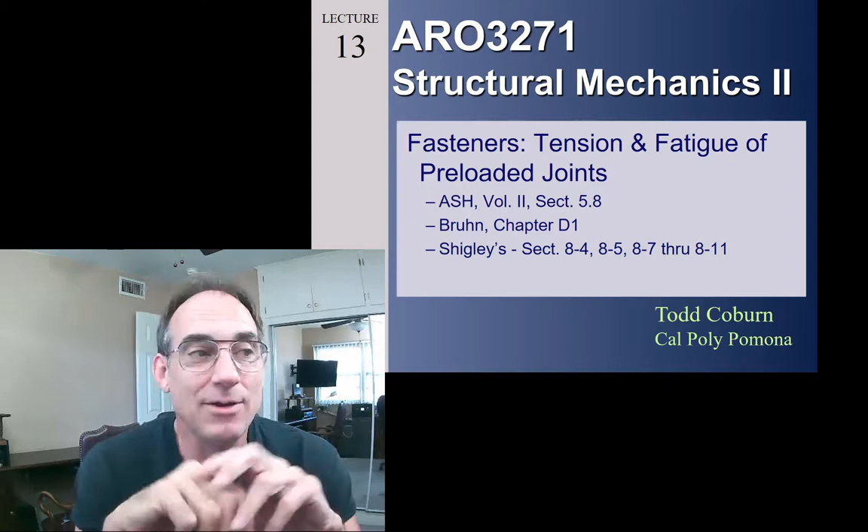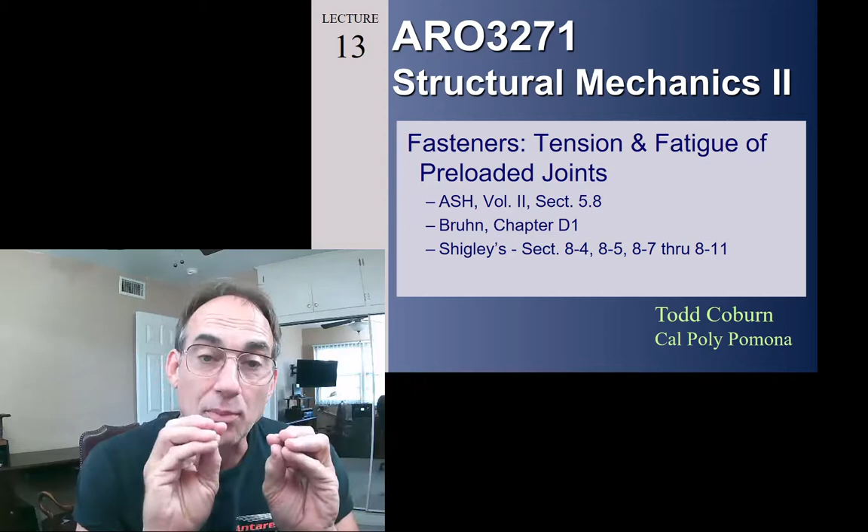3271. Today we're going to be continuing our study into fasteners, and we're going to be looking specifically at tension and fatigue of preloaded joints. We talked about preloaded tension joints last time. We're going to be talking about fatigue this time.

So let's first take a quick look at what we learned last time. We learned about the equivalent bolt stiffness, how to calculate that. Usually we're going to have two terms, one for the shank, one for the threads. We learned how to calculate the member stiffness. We learned that we were going to take a cone at 45 degrees. Now we recognize that other cone angles can be used like 30 degrees, even 60 degrees, but we're going to use a cone of 45 degrees in this class, which keeps our analysis simple and straightforward. We introduced the joint stiffness constant and learned how to determine what the joint forces are in the bolt and the clamp up forces in the members.

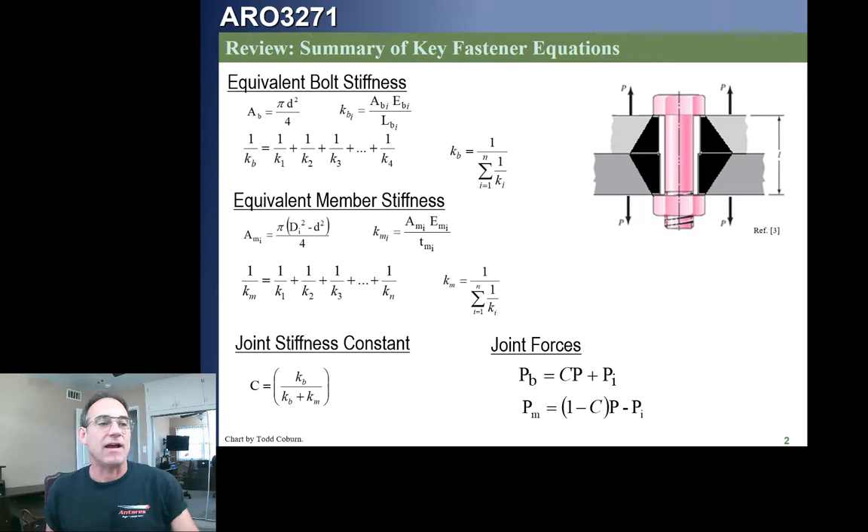Now these two equations once again are valid as long as the members remain in compression, as long as the force in the members is negative. If it's zero or positive, then actually that's incorrect. It's not possible. That means that it's unloaded, that your joint constant is ineffective, and all the load goes into the bolts.

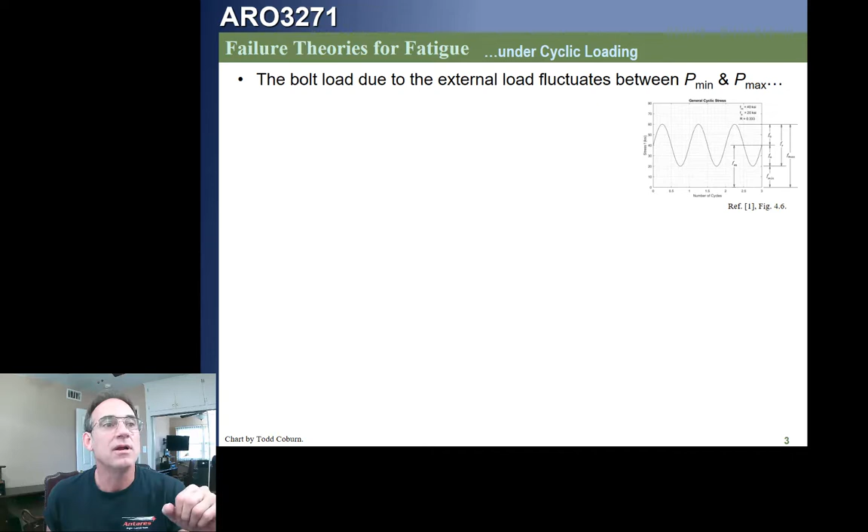Now when we want to do fatigue analysis, having recognized everything we just learned in the last lecture, we saw before that with fatigue we had to characterize our loading. We had to look at the loading parameters, which basically involved identifying the max and the min load so that we could identify the mean and the alternating stress and calculate the fatigue on that basis. We're going to do a very similar thing with some slight deviations for bolts. The bolt load, we'll look again at the max and the min bolt load. We need to get that first.

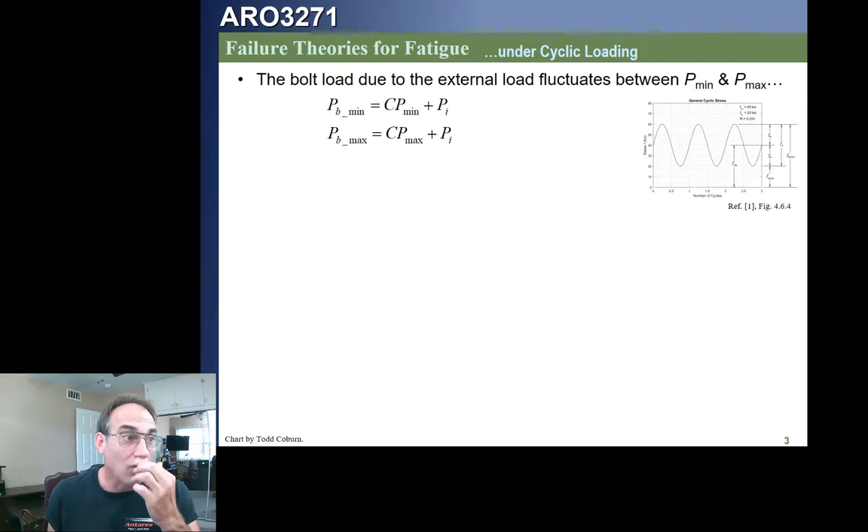First, we're going to take our spring constant. We're going to use this equation as long as, once again, the members remain in compression. If the members remain in compression, then our constant C is whatever value it is. If our members are not in compression, if there is zero or positive, then C is 1 and all the load goes into the bolt. So we identify the max and min bolt loads. We then calculate the mean and alternating bolt loads. Well, that's just, or bolt stresses, excuse me.

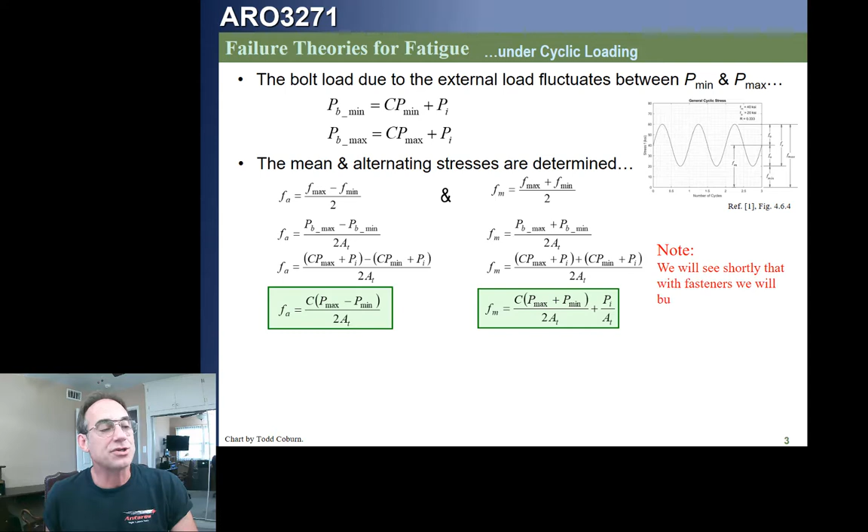That means we just need the max stress and the min stress to calculate using these equations. Since the stress is just P over A, we can write that equation in these formats here and come up with a value for the alternating stress, either calculate the stress max minus min over 2, or use this final equation where the alternating stress is the joint constant C times P max minus P min over 2, area tension. In the same way, we can calculate the mean stress. So these two equations can be used to calculate our stresses in the bolts. Remember, C is just calculated from the formula we got before as long as the joint remains in compression, the members remain in compression.

Then what we're going to do is go and look at, for that bolt, what's the stress concentration factor? We're going to look at that next slide, but we're going to find out that really the only thing for the bolt, we have a stress concentration factor at the head, another one at the thread, but we're going to bury that in the endurance limit for the bolt rather than FM and/or FA. So this is a different approach, slightly different path that we're going to take to fatigue than we learned when we calculated fatigue before for general parts, and that's because our stress concentration factor for bolts themselves are already accounted for in the endurance limit, which means we're not going to apply it to the stresses themselves.

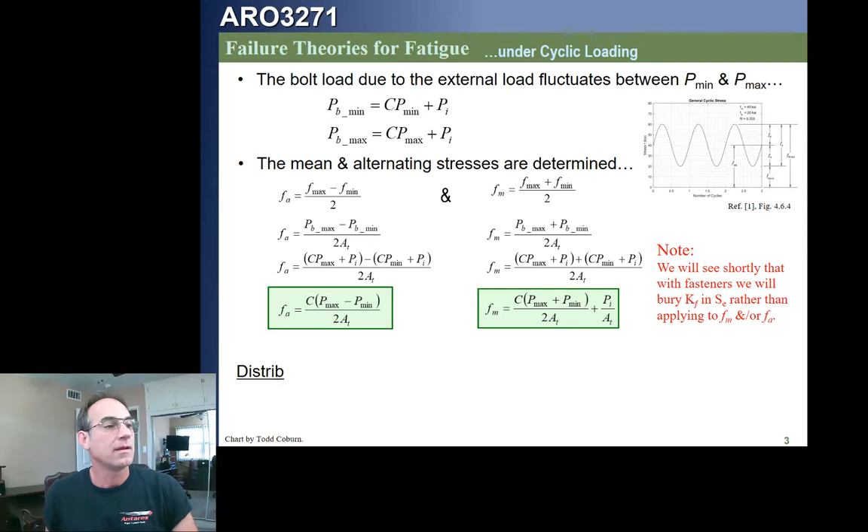Now, if we actually looked at a bolt, we would find that 15% of those failures occur underneath the head of the bolt, 20% at the end of the thread, and 65% at the thread at the nut face. Let's go ahead and take a look at that real quick.

Let's go ahead and draw a bolt here, and let's assume that this bolt is clamping together some parts. So we have a fillet here, there, and then we go into our threads, and then we have the end of the bolt.

And down here we have some kind of nut. We're not even going to draw the washer. Whether or not there's a washer is irrelevant to what we're doing here.

We're going to see that 15% of failures occur underneath the head, right here. Remember, if we are pulling tension on this bolt, which is pulling the joint apart, the head is sitting in a material and it's flexing like this as the shaft of the bolt is being pulled downward, that causes that head to flex. So since that head itself is in bending, we've got tension on this shank, P over A on the shank, P over AT.

And we're going to get, because of this fillet here, a little stress concentration factor. That's why we don't make a really sharp fillet or a really sharp transition from the bolt to the head. We tend to have a nice rounded joint.

Now for all of our bolts made to SAE or ASME standards, there's a requirement for what this radius should be underneath the head. So these made to a standard will all be accounted for in the same way, and that's designed to not have too big of a stress concentration factor. Because we're getting flexing of the head that's pulling up in that radius, that's going to tend to cause failure where we can get something propagating through the bolt. About 15% of failures occur there.

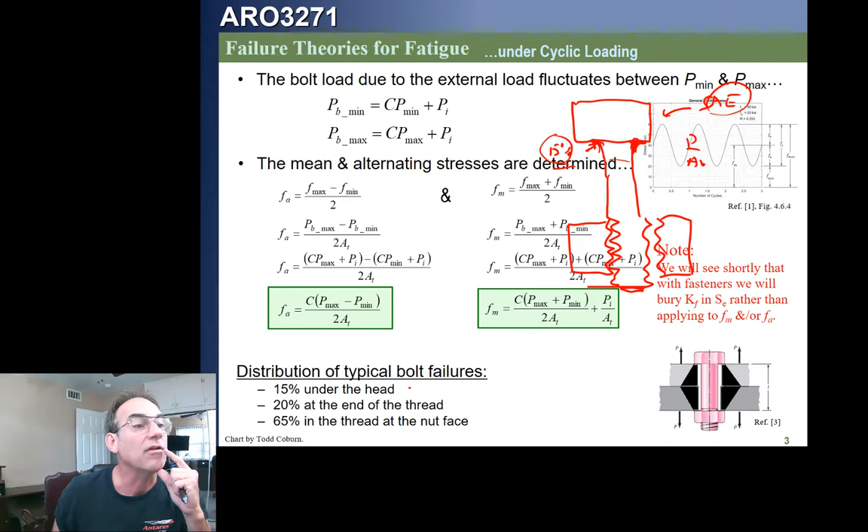Now, about 20% occur at the end of the thread. If we take a look at this, you know what, I'm going to redraw this really quick because I don't like it. Let me erase part of this... there we go, that works. Let's erase my nut and I will redraw that nut for you guys so you can understand this better.

Typically what's going to happen is we're going to have parts that are attached together like this, with some split line, and then we're going to have a nut on this. You'll notice that the start of the threads is right here, and then the start of the nut is down here. So 15% of the failures occur here underneath the head, and 20% of failures occur here at the first thread.

What happens is we have a certain shank diameter, and that's the area of the shank, using this nomenclature, either of those. I'm drawing that cross section. Then on that circular cross section, we've got a thread cutting through it. So what happens is we go from the area of the shank to the tension stress area, A sub T, and there's a little cut out of that area which introduces some stress. That's the first place it happens, so we tend to get about 20% of the failures there.

Now basically once you hit that, you're going to continue. Each thread is going to have a similar stress concentration factor. That first one will probably be the worst, but then we get to the nut. Where the nut is interlocked with the thread, let's say the thread's like this and the nut locks in here. Wherever the nut is, remember that's where this loading is, and that's going to tend to stretch the first thread at the nut face.

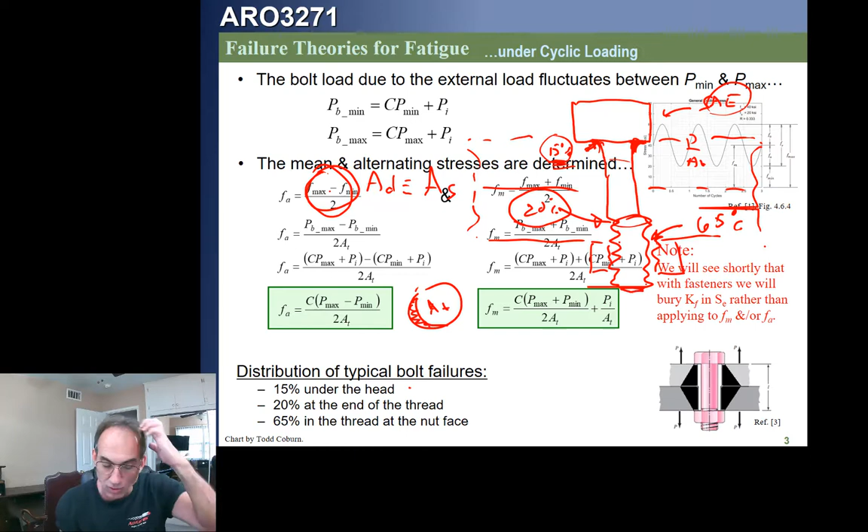The first thread after the nut face is going to tend to open up. That's this one down here. And because that one has nearly the same stress riser as this, but it also has that thread flexing, it's causing flexing of the thread in addition to that tension. That's going to end up making this worse. So about 65% of failures are going to occur right there at the first thread after the nut face starts. So that's where these failures occur.

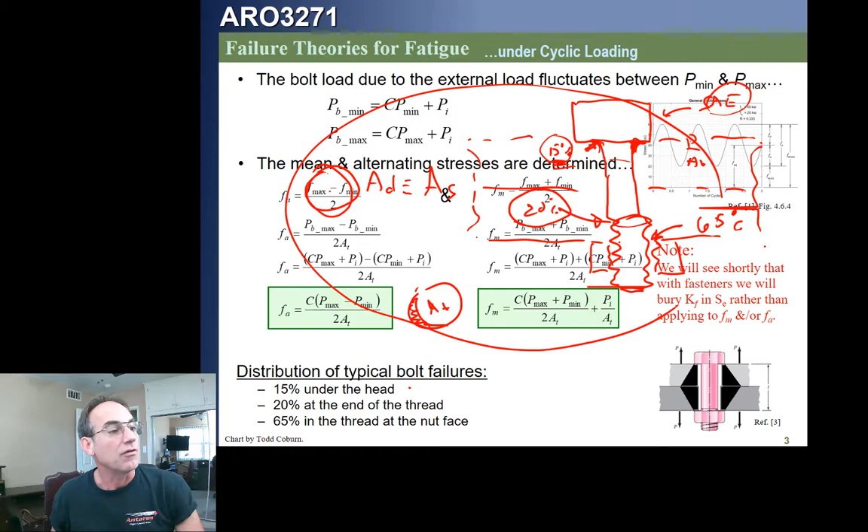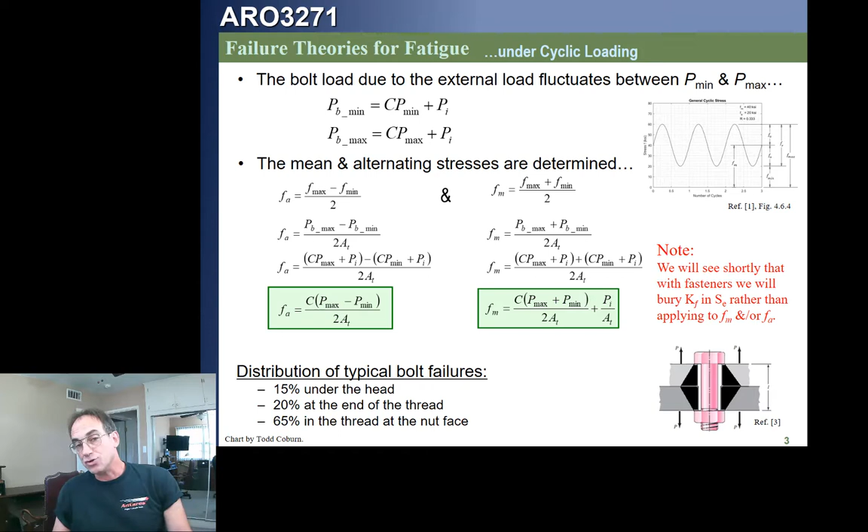Now we're not going to do anything with that other than to recognize that that is where we would expect failures to occur. For this reason, this is why we have a nice healthy radius underneath the head of the bolt, and this is why we tend to like to use rolled threads, which give better fatigue properties rather than cut threads.

Once again with bolts, we're going to have to choose a failure criterion in the same way that we did before. The difference is that, remember, when we looked at fatigue before, once we chose a failure criterion, we would plot the mean stress of our point against the alternating stress. That gave us a point, and then we'd draw a line from the origin through the point and look at the relative proximity to the failure line in order to evaluate the margin of safety.

Now we're going to do the same basic approach, but instead of starting at 0, remember the bolt, if it's preloaded, has a stress to start with. So the mean stress starts at that preload. Whatever the preload is, that's the preload stress. Then we plot our point, mean versus alternating, and draw a line from that preload through that point. Now, we're actually not going to have to do this because we've got a closed form equation.

I've already given you that equation here. This is the equation of the failure line from where it's preloaded to whatever point. So we just plug in our preload stress, our mean stress, and our alternating stress, along with the FTU of the bolt, the S sub E of the bolt, and that gives us, abracadabra, when you plug in your numbers, out pops the margin of safety. New math.

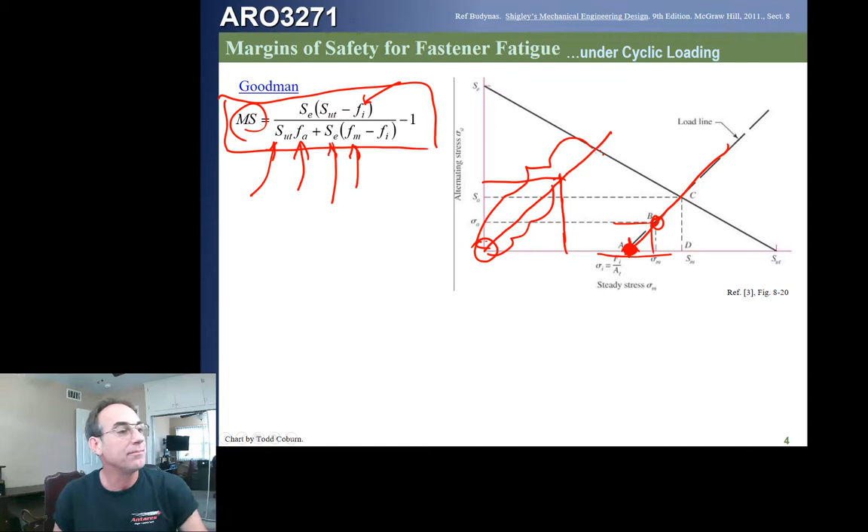Now for yield, remember, we might also want to check yield. If the stress is too high, the bolt might yield, and if the bolt yields, you may see a change in the properties based on what we calculated originally. So this is kind of like what we call the Langer criteria. We're basically taking the max stress and evaluating against yield.

Now for bolts, rather than checking yield, if you have an aerospace bolt and you don't have the proof or proportional limit of the bolt, the proof load or proof stress, then we will use the yield allowable. But many of our non-aerospace bolts have an FTU, an FTY, and a proof load or proof stress, and in that case we will use the proof allowable, which we're calling S sub P. That's the proof allowable. So for a non-aerospace bolt, look at that column we introduced a couple lectures ago, that will give you the proof load.

If you don't have a proof load because it's one of the materials in the back of your handbook rather than one of the bolt materials we gave you, then we'll just use S sub Y, the FTY. You've got your thread area and your max loading, so you can find out if there's yielding. Now, if there's yielding, that doesn't mean you have a fatigue failure. It means you might have one. It means that the margin of safety fatigue might not be valid.

Now, the other thing we need to do is check for separation. We need to make sure the joint doesn't separate, or more precisely, that the members being squeezed by the preload of the bolt don't unsqueeze under loading. If it unsqueezes, that means our C becomes 1 and all the load goes into the bolt. So instead of the full member load equation I gave you before, we take part of it: the member relaxation due to external load. You take the preload, P sub i, divided by the max external load times 1 minus C, and that gives you the margin of safety. Of course, this is only valid if your joint remains in compression, and this margin of safety tells you whether you separate.

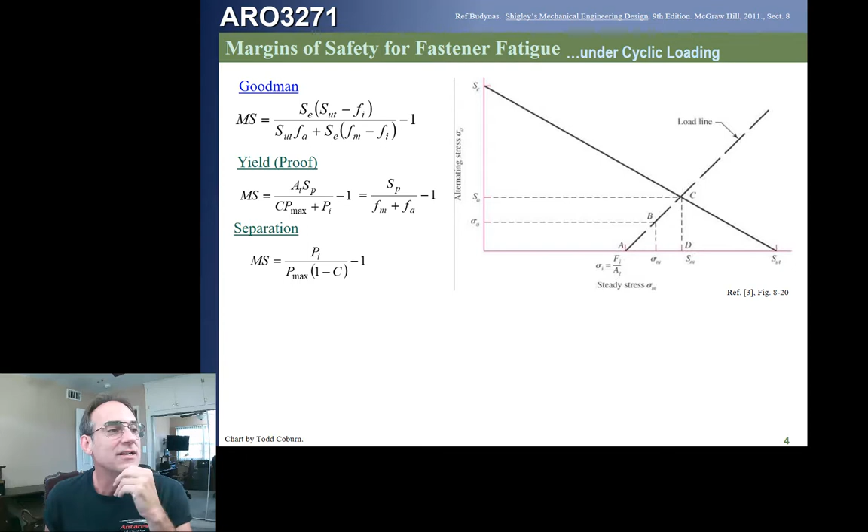If we chose a different criterion, like the Gerber criterion, you've got this equation, which has the alternating stress, the endurance limit of the bolt, and the FTU of the bolt. Notice that in the Goodman criteria I am using SUT, that's just FTU, and in the Gerber criteria I'm using FTU, which is actually the same thing as SUT. So it's the FTU of the material, or the max ultimate strength.

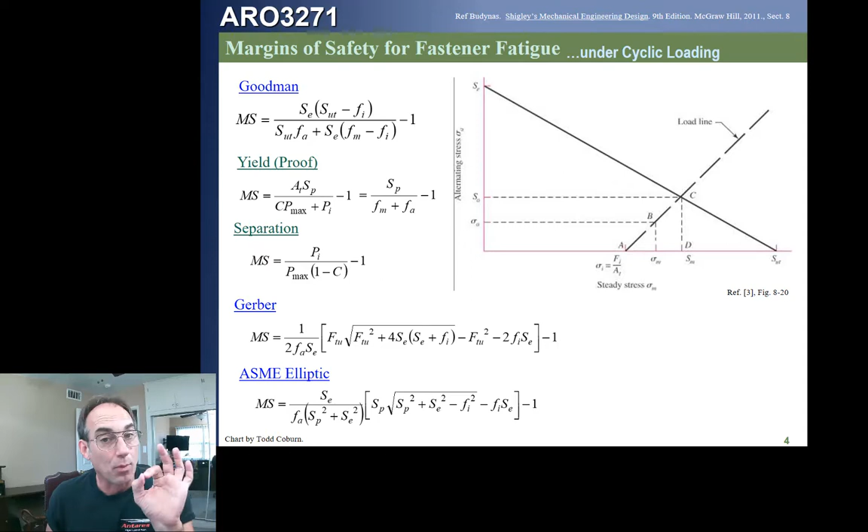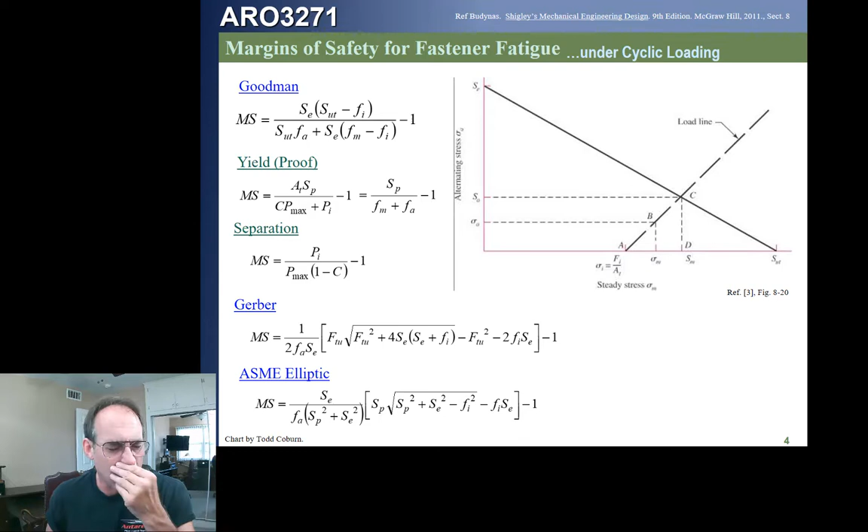We've got the endurance limit, we've got the preload, and that's it. If we use the ASME elliptic criteria, then we've got this equation. We're going to plug in the endurance limit, the alternating stress, and the proportional limit of the bolt. Notice this is the proportional limit of the bolt. If we have a bolt where we don't have a proportional limit from that table, then we'll use FTY.

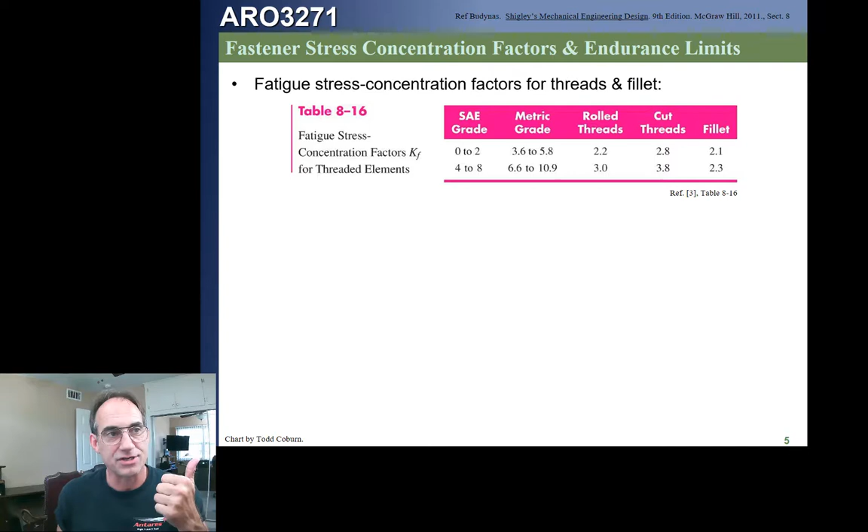But if we have a proportional limit listed for non-aerospace bolts, then that's what we'll use. That's how that works. Now, I told you we weren't going to apply a stress concentration factor. This is the fatigue stress concentration factor for different grades of bolts. The first column is for rolled threads, the second column is for cut threads. You can see cut threads have a higher stress concentration factor. We also have a value for the fillet underneath the head of the bolt.

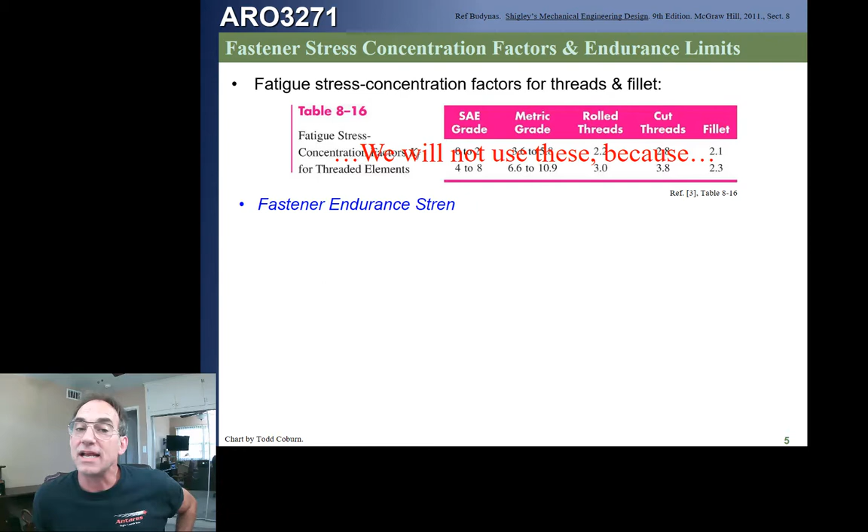However, we aren't going to use this, because what we're going to do is dump that right into the endurance limit. If we use these endurance limits for grade 7, 8, and so on, those endurance limits are based on testing, which means that bolts made to those standards already had whatever stress concentration factor was valid. Therefore, these endurance limits include that, so we're not going to apply it again. We're not going to apply that fatigue stress concentration factor a second time. Does that make sense?

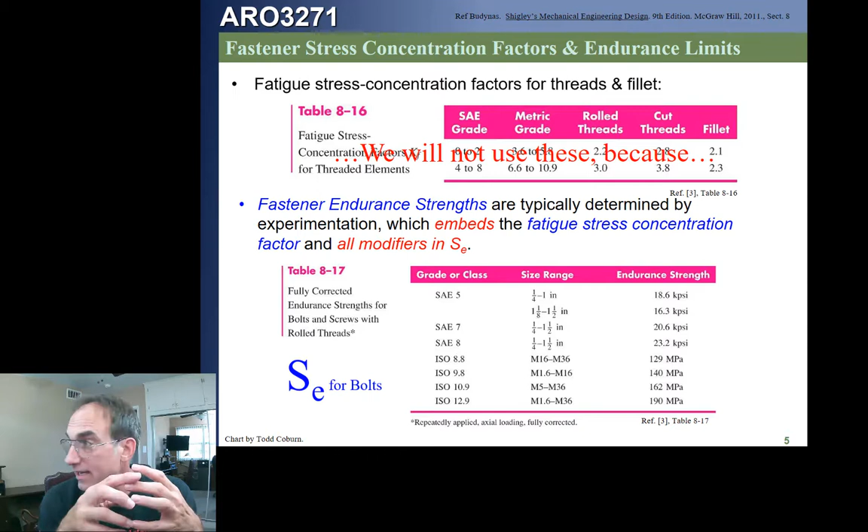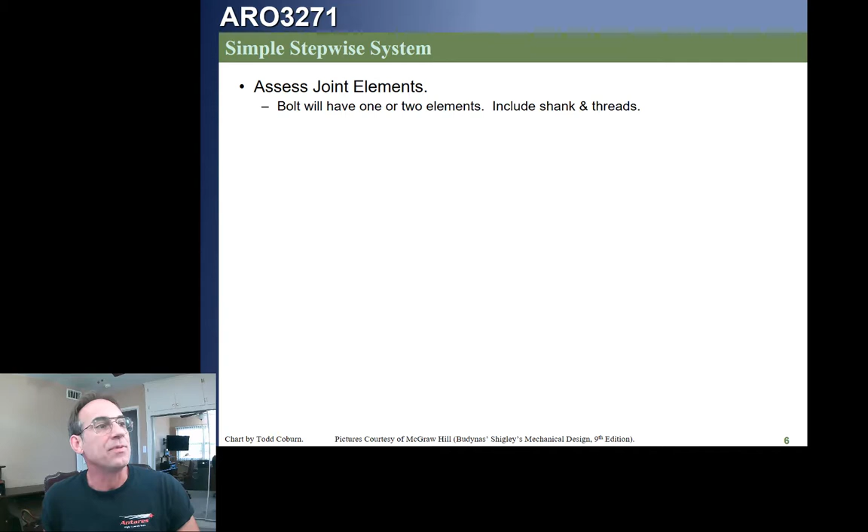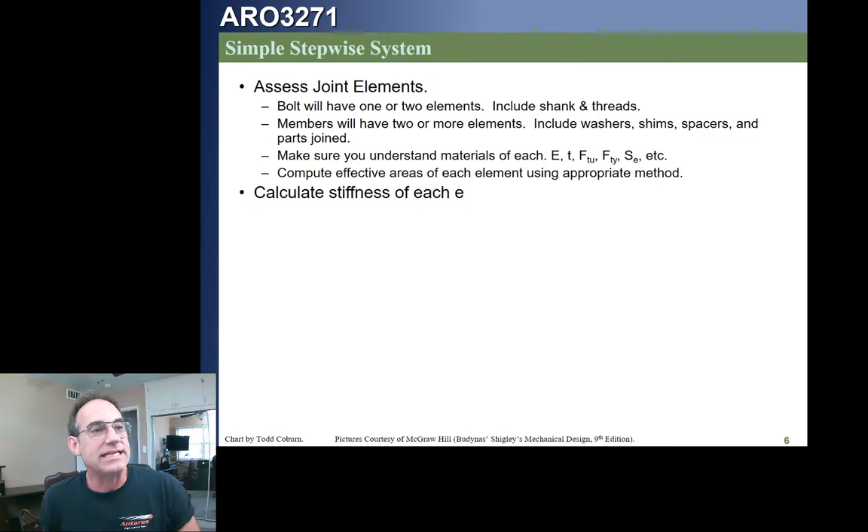Okay, so here's a basic, simple, stepwise system. We're going to evaluate our bolt stiffness, K. We're then going to evaluate our member stiffness using that 45-degree cone angle. We're going to make sure we have all the detailed information we need. We're going to compute our effective areas, calculate the stiffness of each of those, and determine our effective stiffness for the bolt and for the members.

We're going to calculate any preload values and any external load values. We're going to calculate whether the joint, the members, remain in compression or not. We're then going to calculate our max and min bolt load, and the average and alternating stress in the bolt. Then, once we choose a failure criterion, we will calculate the margin of safety in the bolt.

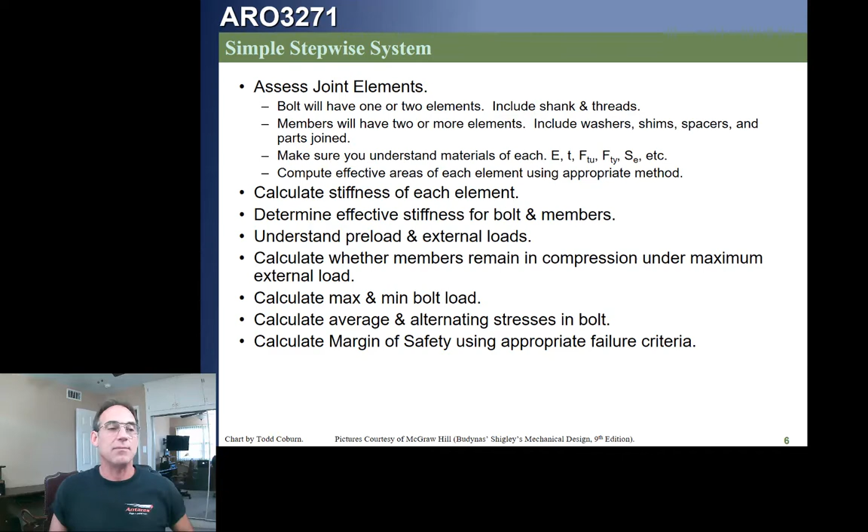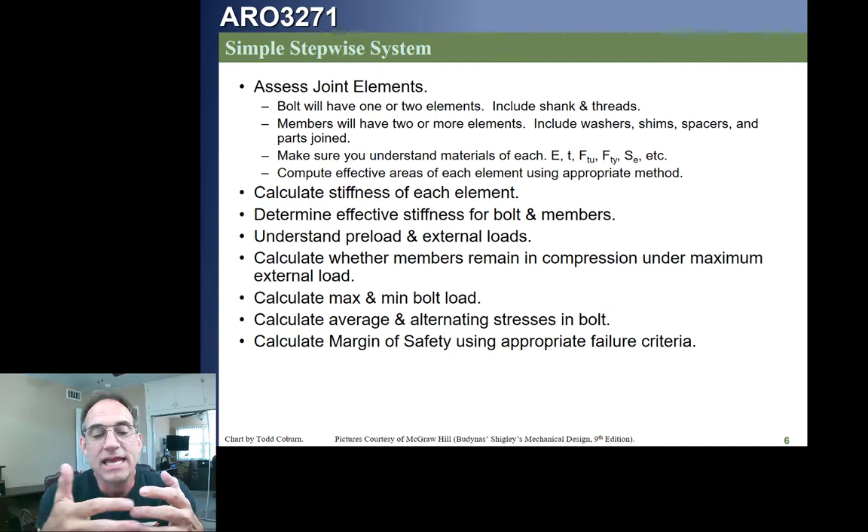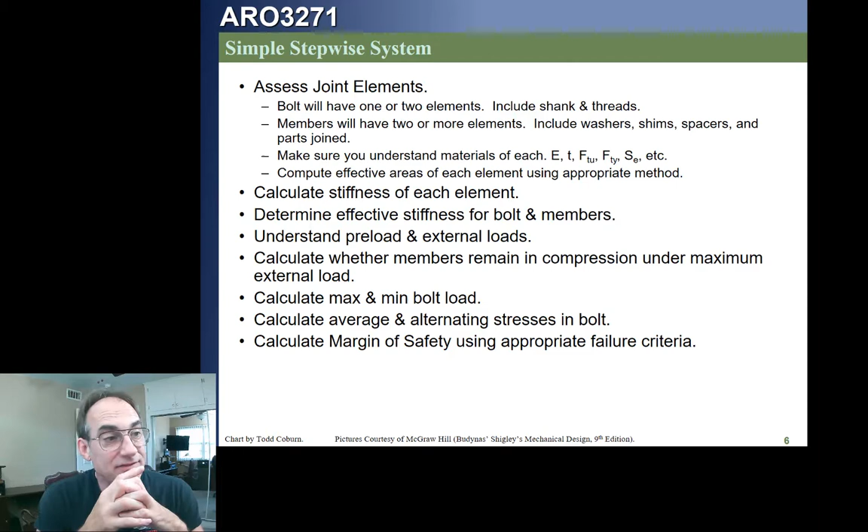Now remember, when we evaluated fatigue, we were evaluating the margin of safety for infinite life. If it succeeded, if it was a positive margin of safety, we expected infinite life. If it was negative, we did an additional analysis to figure out how many cycles it's good for. We could do that for bolts, but we aren't going to, basically because bolts tend to have lots and lots of loading cycles. We're going to design bolts for infinite life, which means if it doesn't show infinite life, we're going to redesign that joint in this class. Got it?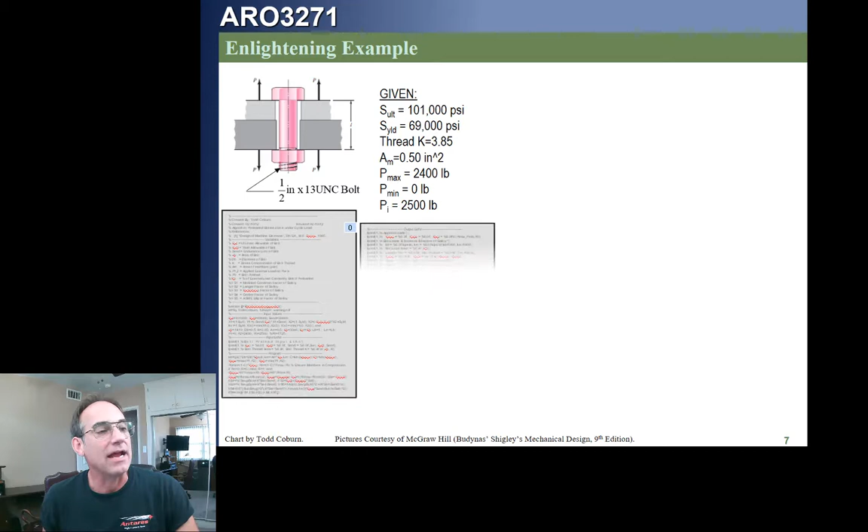Okay, here's a little example, this little MATLAB program I wrote to illustrate how this works. These are some of the input parameters, and this is the factor of safety for those different failure criteria and such. This actually uses a slightly different approach, which applies the stress concentration factor.

But basically what happens is, this is our design point, this little red point here. We see that the modified Goodman criteria is this green line, and blue is the Goodman criteria. If we plot our design point, we find out we have a healthy margin or factor of safety, because when I plot our mean and alternating component of stresses here, we find that it's well within the curve.

But what happens if, instead of the design point we have, which had both preload and external load, we had zero preload? If we had zero preload, that means all of the external load causes stress on the bolt. What that means is we start out here at this point, something like 1 and 3.3, and we have a negative margin. As we add preload from that zero point, that means we're talking about right here. If we have no preload, this is our point, and if we draw a failure line, we see that we're very negative, okay?

Now, if we start increasing the preload, let me get rid of that stuff.

If we start increasing the preload, our margin of safety, or the movement of that point, gets more and more negative. We're getting more and more negative as we move this way, until some point where suddenly, as we increase the preload, all we're doing is increasing the mean stress. We're not changing the alternating stress.

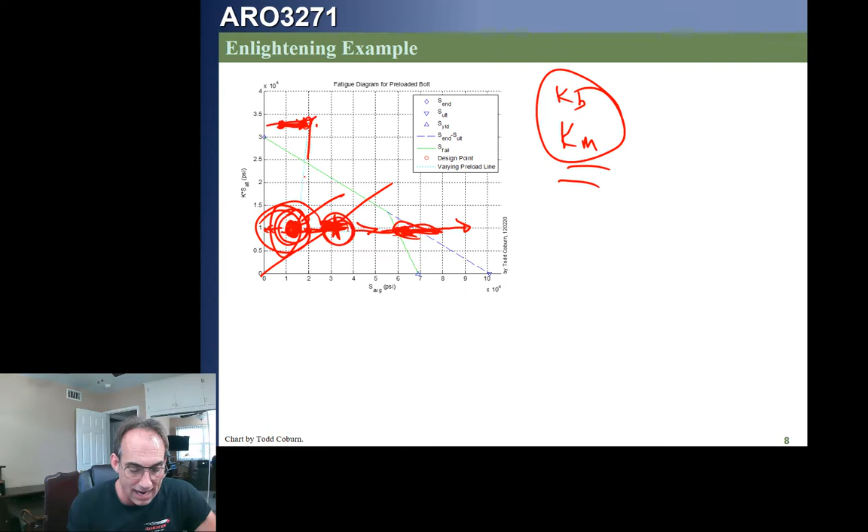So we don't want to design for this point. What we want to do is design for something out here, so any slight fluctuation in our analysis doesn't change that it's a positive margin, but there's no need to increase the preload so high that that same uncertainty could cause us to go outside the envelope. So designing so that we're past this point and then some out in this range here is just a wise idea. Does that make sense?

All right, so that's how this thing kind of works. Here's my little graphic, let me show it again. So we're moving from this preload point where we have no preload to more preload, till we've finally got enough to stay in compression, and then we just start increasing to our design point and beyond.

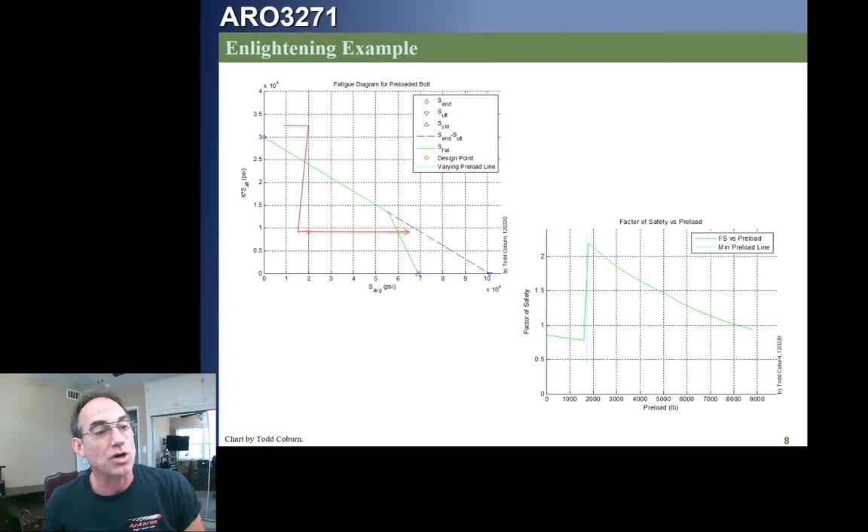This is another picture of the factor of safety. We had a factor of safety that was less than 1, which means our margin of safety is negative. It gets worse and worse until we get to the point where we stay clamped up. Then our factor of safety and margin of safety both jump up, and then it starts to degrade. That's how that looks. Make sense?

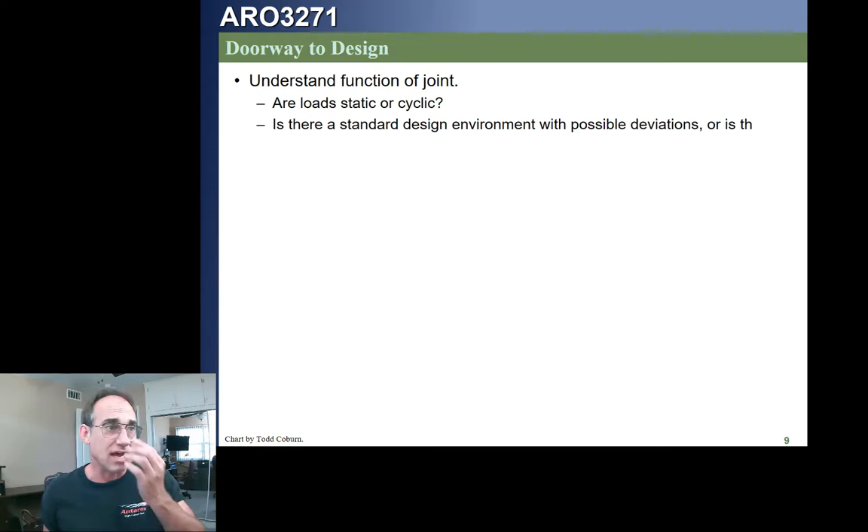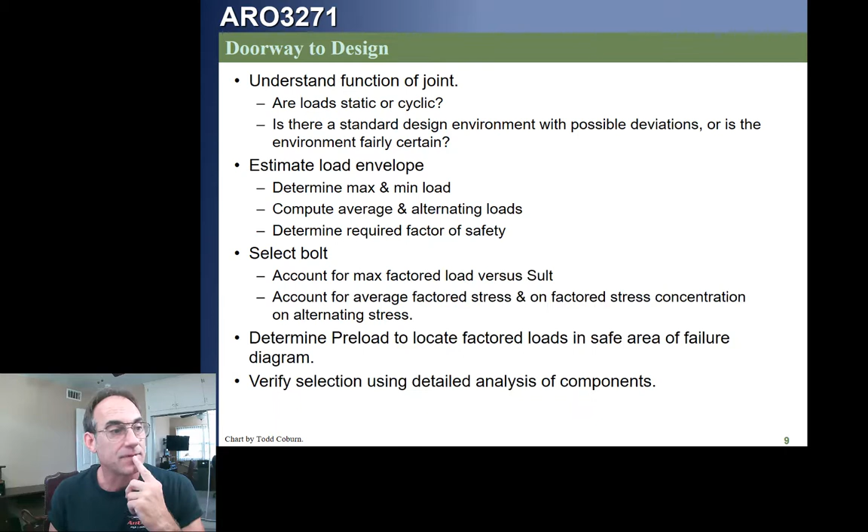So this little chart is just to kind of give you some ideas about design. We're not really going to use this much in our class, but it's just giving you some ideas for what to think about if you're actually designing structural joints. So you can study this at your leisure and use that as you need to in your project work.

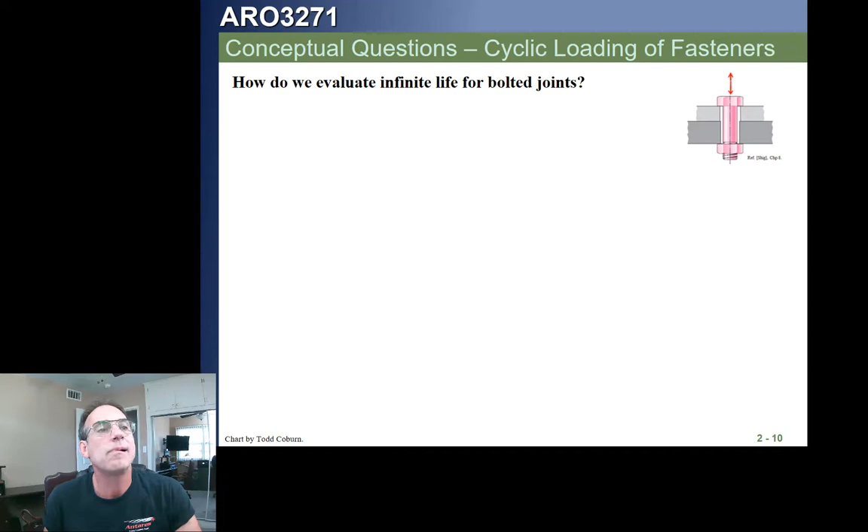Here's a couple conceptual questions. How do we evaluate infinite life for bolted joints? Think about that for a moment. We're going to select our failure criteria and then use our margin of safety equation. How do we determine non-infinite life? We'd have to go back to what we learned for parts.

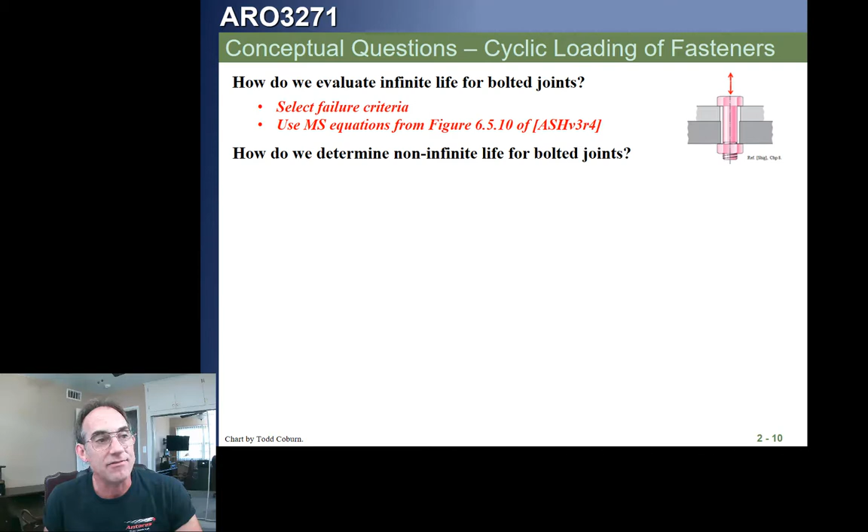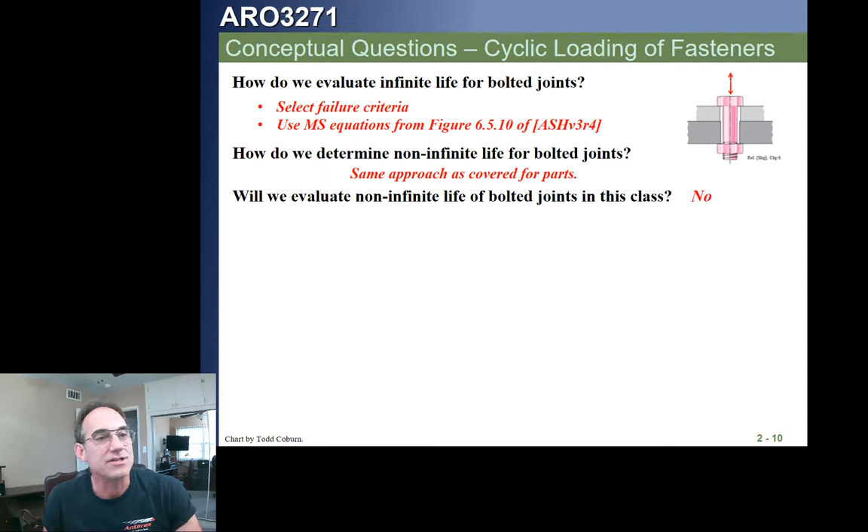We're actually not going to do that in this class. Will we evaluate non-infinite life of bolted joints in this class? No, we just said that. Why? What is the difference about our infinite life margin of safety calculations? I can't spell calculations—just imagine that C and that U are reversed in that statement.

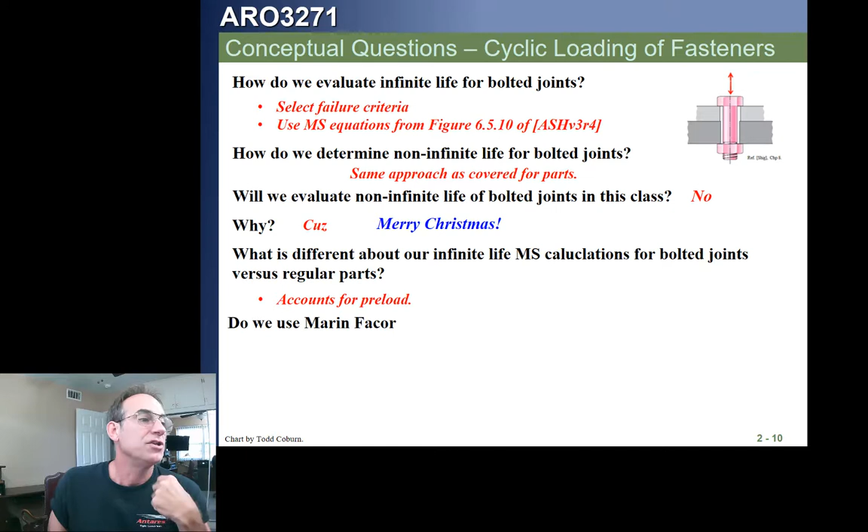What is different about our infinite life margin of safety calculations for bolted joints versus regular parts? Do we use Marin factors for bolted joint endurance limits in this class? No, because remember, everything's included in our Se from testing. Could we? Of course. Shì. That means yes. Okay, where do we get the endurance limits for our bolted joints?

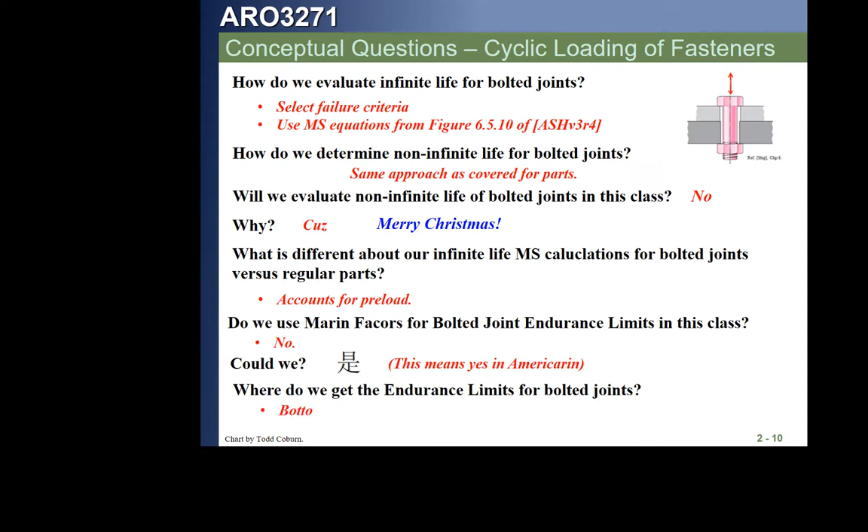Actually, these page numbers listed here and this figure number might have changed since I wrote this slide. Okay, so that's all I got for you. This is how it works. You now are armed and dangerous. You know how to calculate, how to get data about bolts, both non-aerospace and aerospace bolts and fasteners. You know how to calculate margins of safety. You know how to analyze preloaded joints, joints loaded in shear where the loads don't go through the centroid of the fastener pattern. And you know how to evaluate fatigue of bolted joints. Enjoy.